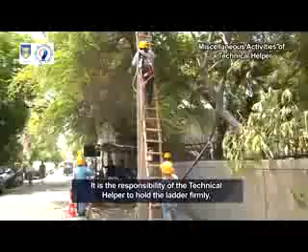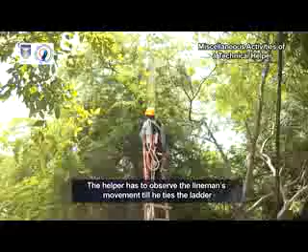First of all, the lineman and helpers mark the safety zone by placing safety cones and caution tapes around the workplace. It is the responsibility of the technical helper to hold the ladder firmly so that the lineman can climb up the pole with his safety PPE and rope. The helper has to observe the lineman's movement till he ties the ladder and the safety belt to the pole. The helper must wait for the lineman's instructions and act accordingly at all times.

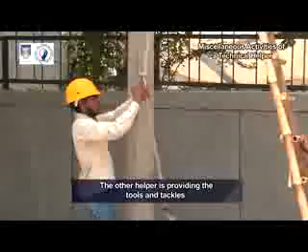Here, you see a technical helper holding the ladder firmly. The other helper is providing the tools and tackles. See carefully the knot and how it is tied so that the hook remains gripped within the rope knot and safely reaches the lineman without falling.

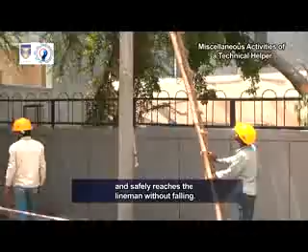Now, the helper is providing the ring spanner through the rope using the reef knot. The tools being passed on to the lineman remain gripped within the rope's knot. The knot is such that it is easy for the lineman to untie it.

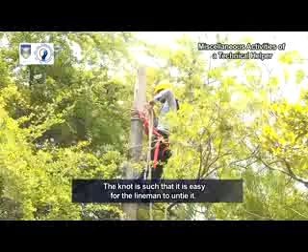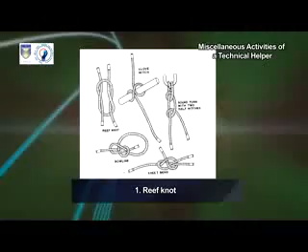Next, we will learn about the different kinds of rope knots used for activities, like preparing the jhula, providing tools to the lineman on the pole, bundling of material and lifting and unloading of the material. Generally, 5 types of knots are used, namely reef knot, clove hitch, round turn with 2 half hitches, bowline and sheet bend.

Now, we will see the collective approach of technical helpers in pulling the LT-AB cable. Here, the lineman has fixed the pulley to the hook on the pole at different locations to pull the cable. The AB cable has been inserted by the lineman onto the rollers of the pulley. Technical helpers are now pulling the rope so that the cable slides smoothly over the roller.

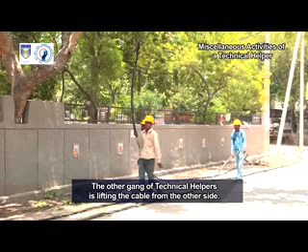Here, the end of the AB cable tied to the rope has reached the ground. The technical helpers are pulling the cable with the help of the rope. The other gang of technical helpers is lifting the cable from the other side. The cable is being laid on the roadside in alignment with the pulleys.

You can see that the AB cable is sliding over the pulleys placed at different locations and the technical helpers are lifting the cable from the ground for smooth sailing without any damage to the cable due to the formation of any twists in the cable.

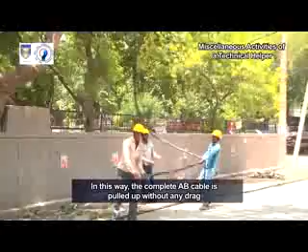In this way, the complete AB cable is pulled up without any drag on the surface of the cable. The complete AB cable has now been drawn and hooked up on the PCC pole. With this, you have seen the role of a technical helper in laying the overhead LT-AB cable.

Let us now look at the digging process, where the technical helper prepares the pole pit, cable trench and the test pit for preparing and testing of the cable joint. Given here are the common tools used by technical helpers for digging and refilling. Hoe for digging soft soil and refilling. Pickaxes for digging hard soil. Shovel for refilling clay. Crowbar for removing hard rock.

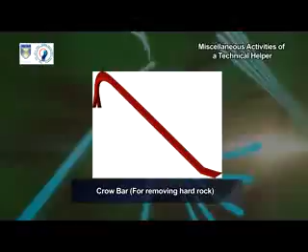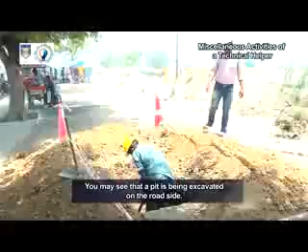Here, the digging process is being carried out by the technical helper using the hoe and pickaxe. You may see that a pit is being excavated on the roadside. The safety zone has been barricaded by cones and caution tape.

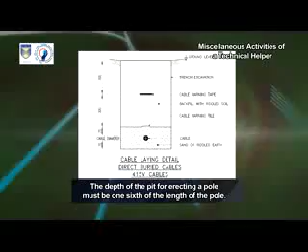The depth of the pit for erecting a pole must be 1/6 of the length of the pole. For HT 11-meter PCC pole, the depth is 183 centimeters, 6 feet, and for LT 9-meter pole, it is 153 centimeters, 5 feet.

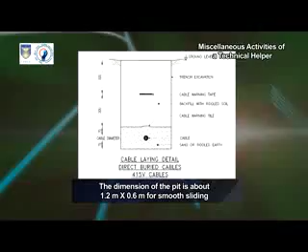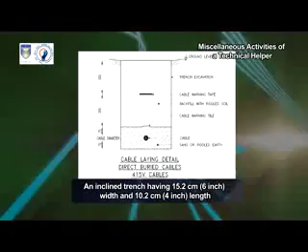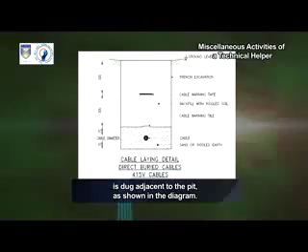The dimension of the pit is about 1.2 meters by 0.6 meter for smooth sliding and perfect placement of the pole in the pit. An inclined trench having 15.2 centimeters (6-inch) width and 10.2 centimeters (4-inch) length is dug adjacent to the pit, as shown in the diagram. The depth of the LT cable is maintained as 75 centimeters. The detail of trench excavation is shown in the drawing.

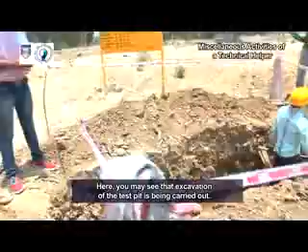Here, you may see that excavation of the test pit is being carried out. The HT cable will be prepared straight through the joint. The dimensions of the pit will be 3 meters by 2 meters and depth as 1.5 meters.

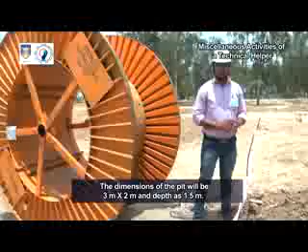In this unit, you have seen the role of the technical helper in the excavation process. With this, you now know the details of the pit for erecting a pole. You have also learnt about the open cable trench and the test pit for preparing the cable joint. Now, we will see the role of a technical helper when a cable is being laid.

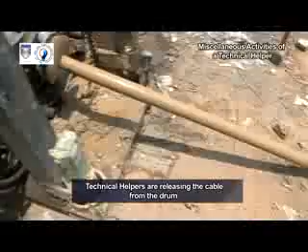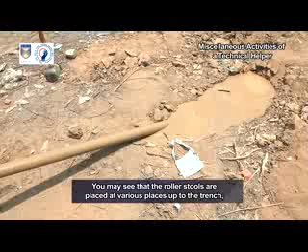Technical helpers are releasing the cable from the drum. This process does not put any stress on the cable, as the cable is loosened easily over the roller stools. You may see that the roller stools are placed at various places up to the trench so that the cable goes forward smoothly without any damage to its insulation.

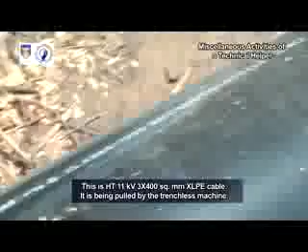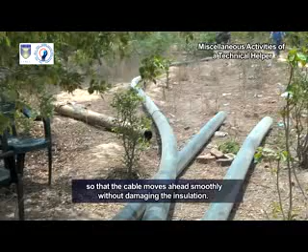This is HT 11 kV 3 by 400 square millimeters XLPE cable. It is being pulled by the trenchless machine. The circumference of the cable is big and it looks too heavy. The helpers pull the cable by using roller stools at specific distances so that the cable moves ahead smoothly without damaging the insulation.

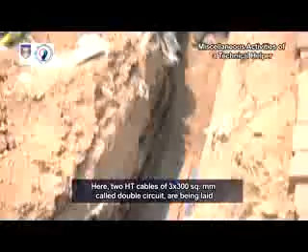Now, let us see laying of the cable in an open trench, where 2 HT cables are being laid. The 1.2 meter depth of the trench is the same as for a single cable. However, the width has been increased to maintain a certain gap between the cables. Here, 2 HT cables of 3 by 300 square millimeters called double circuit are being laid in an open trench.

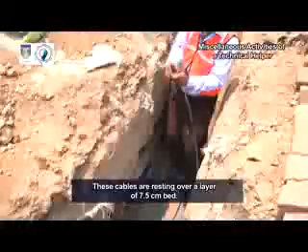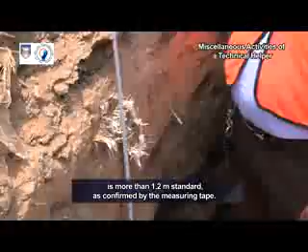These cables are resting over a layer of 7.5 centimeter bed. The gap being maintained between the two cables with padding of bricks is more than the thickness of the cables. The depth of the cables in the trench is more than 1.2 meters standard, as confirmed by the measuring tape.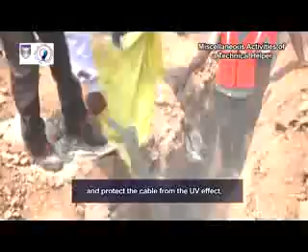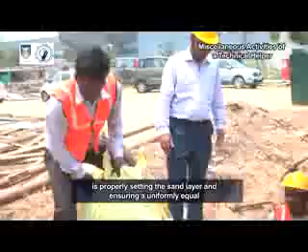Now, a layer of 7.5 centimeter sand is being formed over the cable. The sand is used to provide additional thermal insulation and protect the cable from the UV effect, thus increasing the life of the cable. You can see that one of the technical helpers is properly setting the sand layer and ensuring a uniformly equal distance over the cable.

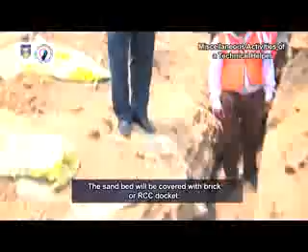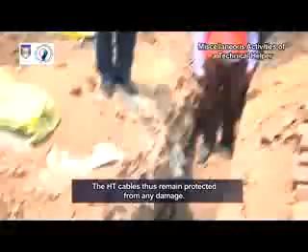Here, a mechanical protection is being given to the cables. The sand bed will be covered with brick or RCC docket. Here, technical helpers are placing bricks in a row. No one can by mistake strike pickaxes or crowbars over the docket. The HT cables thus remain protected from any damage.

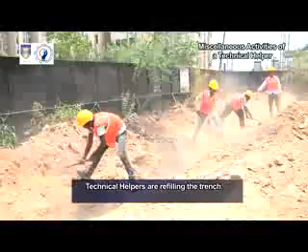Now, you may see the refilling of the open trench. After completing the docketing, technical helpers are refilling the trench. First, they will fill the soft soil and then the hard soil excavated during the digging of the trench. They will ensure that the complete area is in its original form. For this, they will set the excavated soil so as to make it neat and tidy.

Here, we can see erection of the pole. In urban areas, poles are commonly erected with the help of a crane to save on labor and time. However, in rural areas, where the crane facility may not be available, a joint team of technical helpers erects the poles with the help of a bipod and ropes. Let's see the procedure in detail.

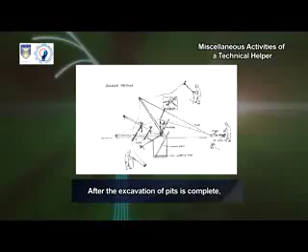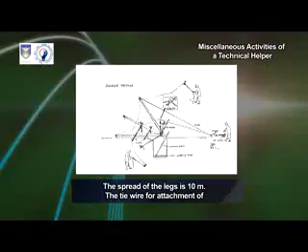After the excavation of pits is complete, poles are erected using a bipod or wooden horse made of 15 centimeters GI pipe 6 meter long. The spread of the legs is 10 meter. The tie wire for attachment of the bipod to the pole is about 6 meter long and is made of 7 by 10 SWG.

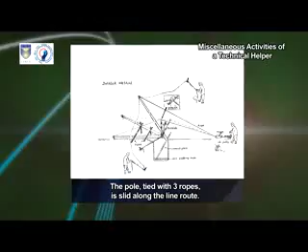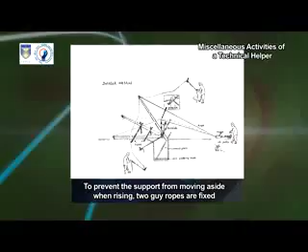Stay wire of 3.15 mm is attached to the pole at 8 meters. The pole tied with 3 ropes is slid along the line route. The rope at the bottom prevents the pole from being dragged in the direction of the pull. To prevent the support from moving aside when rising, 2 guy ropes are fixed on both sides and attached to

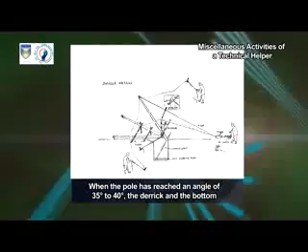the temporary anchor. The bipod is being placed in position and attached to the pole by means of the tie wire. The pull for lifting the poles is provided by the rope pulley. When the pole has reached an angle of 35 degrees to 40 degrees, the derrick and the bottom holding rope is slowly released. When the pole assumes the vertical position, the holding ropes should be held tight.

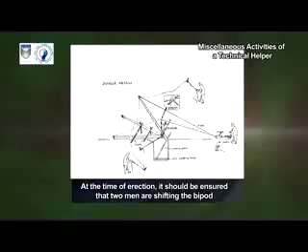At the time of erection, it should be ensured that the 2 men are shifting the bipod as required while the pole is rising. When it is three at 40-degree angle, they will be joined by other 2 men who are at the holding rope.

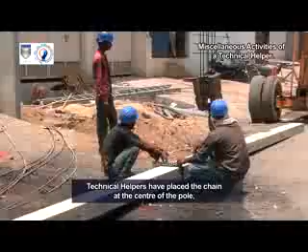Now, let us see erection of the pole with the help of a crane. An 11-meter PCC pole is used in the HT 11 kV line. Here, they are erecting a DP structure. Technical helpers have placed the chain at the center of the pole, so that the pole is hooked and remains vertically balanced when lifted freely above the ground.

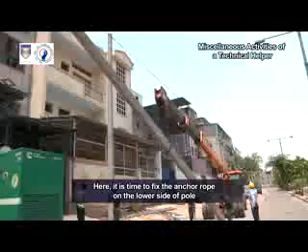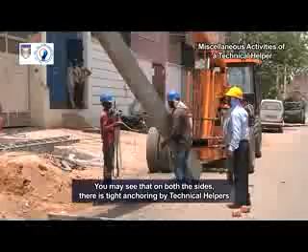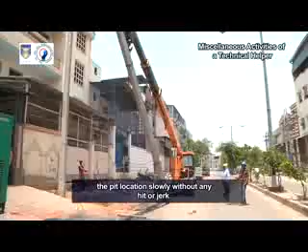Here, it is time to fix the anchor rope on the lower side of pole for maneuvering the movement of the freely hanging PCC pole. You may see that on both the sides, there is tight anchoring by technical helpers to ensure that the PCC pole does not swing. Now, the pole is being vertically lifted by the crane and moved towards the pit location slowly without any hit or jerk. Both the technical helpers are firmly gripping the anchors for smooth movement.

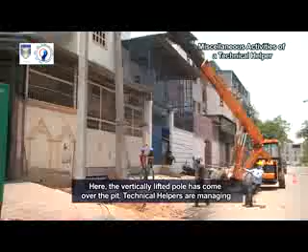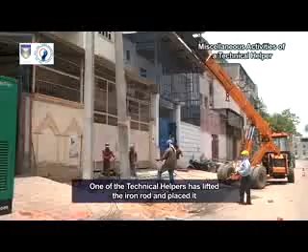Here, the vertically lifted pole has come over the pit. Technical helpers are managing its alignment by pulling the anchors so that the pole can be placed at the exact location. One of the technical helpers has lifted the iron rod and placed it on the MS clamp of the PCC pole to twist it to the correct angle. The pole is now placed at the correct position, but is still hooked to the crane.

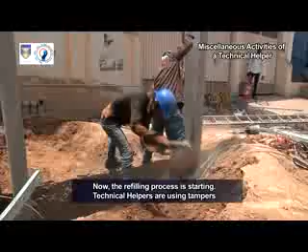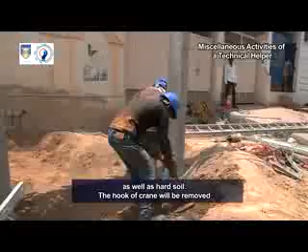Now, the refilling process is starting. Technical helpers are using tampers in addition to the hoe, so that the soil firmly grips the PCC pole. They are filling both hard and soft soil in layers. They are also using the brick lining as well as hard soil. The hook of crane will be removed only after filling and tamping is complete.

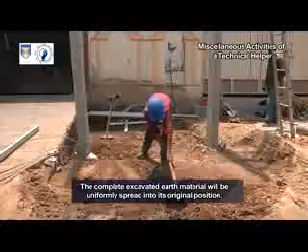Here, the technical helpers are paving the soil of the pit. The complete excavated earth material will be uniformly spread into its original position. Their aim is to make the area neat and tidy.

In this unit, you have seen the trenchless laying process of the HT underground cable. You have seen how the trenchless machine pulls the cable from one end. You have also seen the role of technical helpers in smooth sailing of the HT cable over the roller stools. This is unlike the conventional method of the cable laying processes by preparing the open trench.

You have further seen erection of the PCC pole in the conventional method, where the pole is erected manually by a team of technical helpers. You have also seen the erection of the PCC pole through the use of a crane.

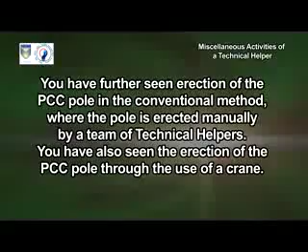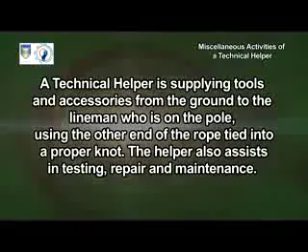A technical helper is supplying tools and accessories from the ground to the lineman who is on the pole, using the other end of the rope tied into a proper knot. The helper also assists in testing, repair, and maintenance. A successful technical helper is one who has sound knowledge of handling the tools, selecting the proper size of tools, as well as their upkeep and storing procedures.

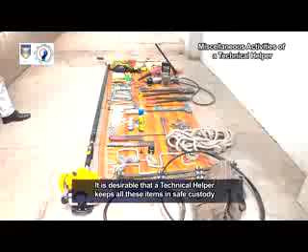Let's now have a close look of the tools and tackles used by a distribution utility as part of its daily routine. It is desirable that a technical helper keeps all these items in safe custody and makes them available on demand. Meet Mr. Sant Ram, who is coming after attending the scheduled maintenance. He keeps all his tools and tackles, including the scrap, at their designated places.

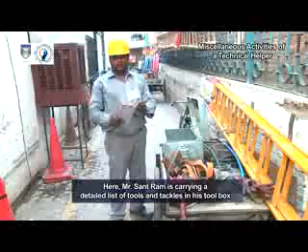Here, Mr. Sant Ram is carrying a detailed list of tools and tackles in his toolbox and is checking these items before leaving the complaint center for the sites or his home. With this, we have seen the entire video presentation on how the miscellaneous activities of a technical helper are performed.